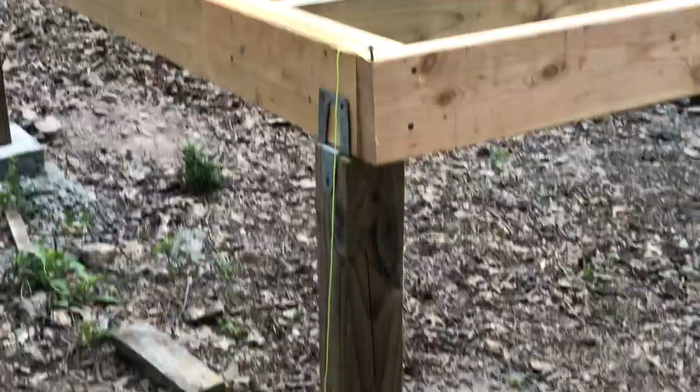So I'm trying to make sure that this is all level, and I put a string line one into the other, and I went through with the level, just kind of checking it out, and it dipped a little bit on that corner, so I raised the corner. Now I'm looking down the string line, and I've got a little bit of a gap, and it starts right there. But I think I need to shim these 2 posts, you can see the gap there. Boy, that joist is kind of gnarly too, I'll have to block it out.

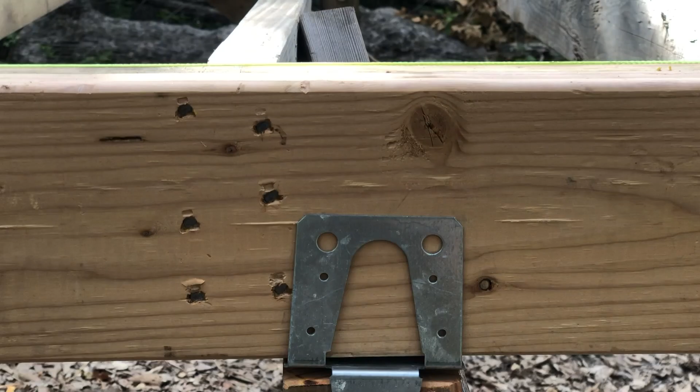I don't know if you can see the gap or not. Yeah, there we go, I got almost a quarter inch. That's more than I'd like, but it's easy to fix. I'm going to put a shim under the hardware, between the hardware and the rim joist on this one

Right now, here's the big stump. I looked at the plans and figured out this is where the toilet is going to be, and that looks strange, I know, but the joist is right in the middle of where the toilet would be, so I've modified it a little bit. I think I might go back later and put in some other supports, like when I'm plumbing, that way I don't have to. I have a ton of room to rough it in, and I'll go back and add 2 joists to give it a little bit more support. I know that's a massive hole, but it's just kind of how it goes.

So I measured, I'm going to have a 2x6 wall here. I measured off that my 12 inches, or 12 and a half with drywall, and then measured another 6 or 8 inches because I've got a doubled up 2x6 for that little girder there, whatever you want to call it. So we're about to finish putting this hardware together, I just wanted to show you that. And I've got one next to it, doing kind of the same thing. It's not as big of a gap, for the tub drain. So it'll be toilet, tub.

I'm back on site, and we are hoping to put on the subfloor today. I got brave and drove up here close. The other day my neighbor drove in a side by side through some tall grass over here. It's kind of on the neighbor's property, but I don't think they're going to care. So that was helpful. Anyway, I'm about to get after it.

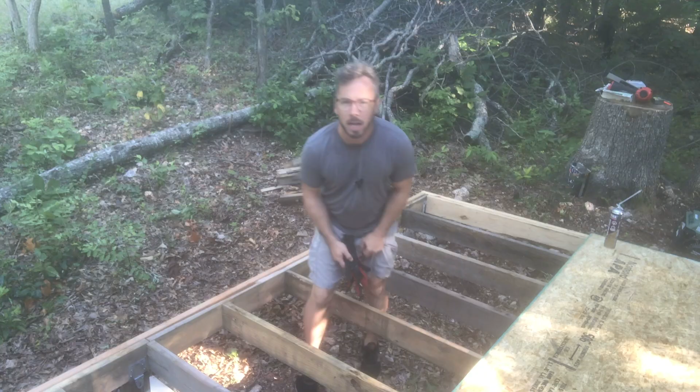I'm about to lay down the first sheet, and I've got this new spray foam. I spent a minute and read the instructions, it doesn't make it sound too crazy. I've never used this stuff, I bought it used from people on the north side of Tulsa, so I don't know, we'll see how this goes.

I sat down, tested my first sheet just to see how it was, and I feel like I'm just a touch out of square, just enough to be a pain in the butt. I can't do any more anyway, I've kind of gone to my limits of flexing the front and the back to make it square. I might have to get creative toward the end of this, which, like I've said before, you've got to be diligent when you first start because everything builds upon everything else. I might have to deal with some out of squareness, but we'll figure it out. I'm going to go ahead and put this down, probably time lapse it, we'll see what happens.

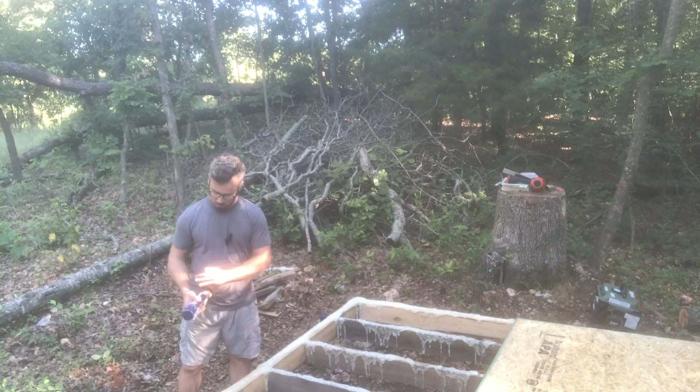I'm going to try another can, that one seemed like it was jacked up. I don't know, the way it came out was not what it looked like on the YouTube video. It expanded and got real frothy and weird. Then I took another can, and it won't even shake, it's like solid. So I might have bought some junk, which is bound to happen a few times, I guess.

I'm going to shake this up and we'll see if we can do any better.

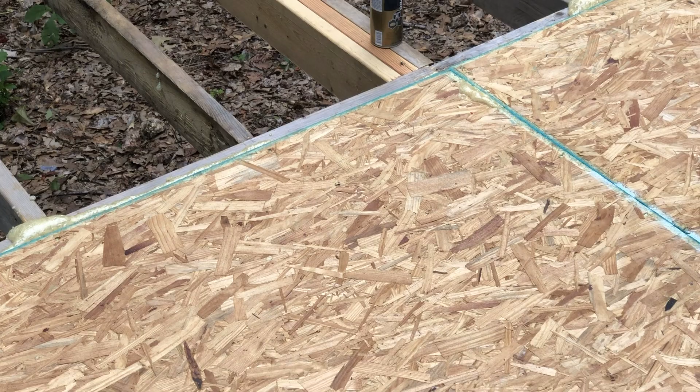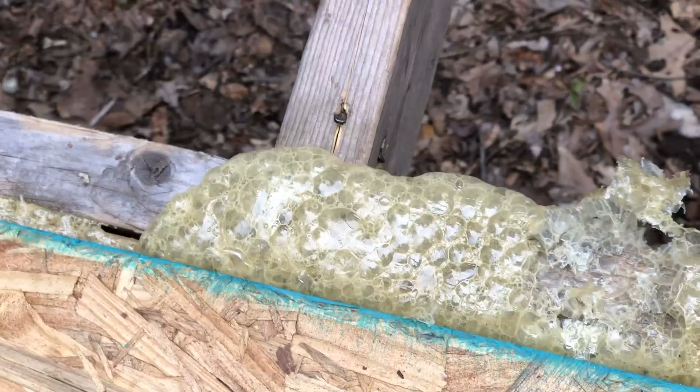We're back on site this morning. We spent the afternoon picking up new materials, and part of that was getting some new glue. This stuff we used yesterday, I think it had frozen or something. It still seemed to do what it's supposed to do, it just didn't go very far, and it was really weird. I don't know. So unfortunately, I'm going to have to scrape all that out because you can't really set it on top of that.

But I'm going to do that, and then I'll show you the new stuff that I've got, which is more what I've used before. It's the stuff you put in a caulking tube. I was hoping this would work out for me because it's really easy to use, you just pull the trigger. A caulking gun kind of wears you out.

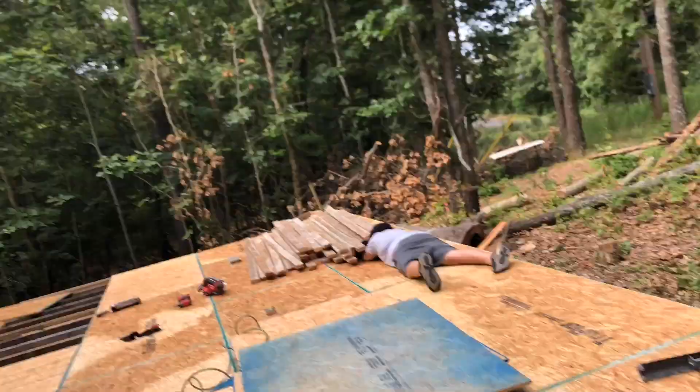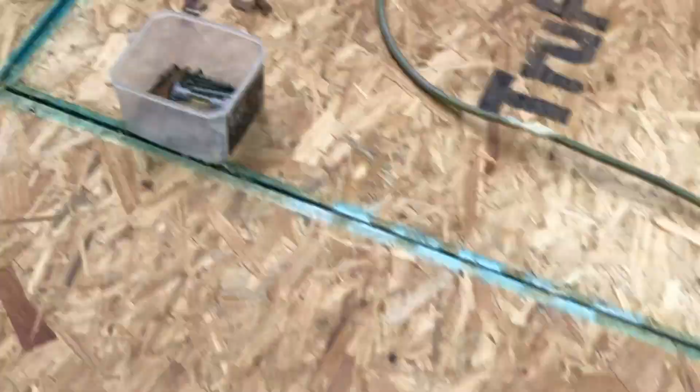Things I wanted to point out while I'm taking a break here. I've got a sheet and a half left for this section, but the material I'm using, you're supposed to give it sort of a gap, and so some of this is intentional and some of it is just fighting the layout. Like, I'm not happy with that gap, but it's the best we could do.

And actually it's a little bit high, like my foot catches it just, 1/8 of an inch. So what I'll do is I'll go back with a belt sander or a hand planer and get it level. Luckily this is the middle of a bedroom, so with carpet and padding it won't be too bad, but I want to make sure I can get it really pretty flat.

But you've got to leave a little bit of a gap for expansion, and also the joints need to be staggered, so it's kind of like a brick lay. I can't get back far enough to show you, let me go over here. You can see my joints are staggered. Every 4 foot is kind of the normal thing. Some of it I may just scab in toward the end when we do the other part of the house over there.

But finishing that up, man, I have had a miserable time with subfloor adhesive. I think the lesson I've learned is not to buy it used, because who knows how long it's been setting.

So another little thing I was going to show you, I was having a terrible time squeezing this out of the tube, and I've seen guys before take and cut this stuff open like this, even when it's brand new and good, just because it's faster sometimes, and kind of scoop it out like you would drywall or whatever, to apply it to headers under door thresholds, stuff like that. I've seen people do it with all kinds of caulking.

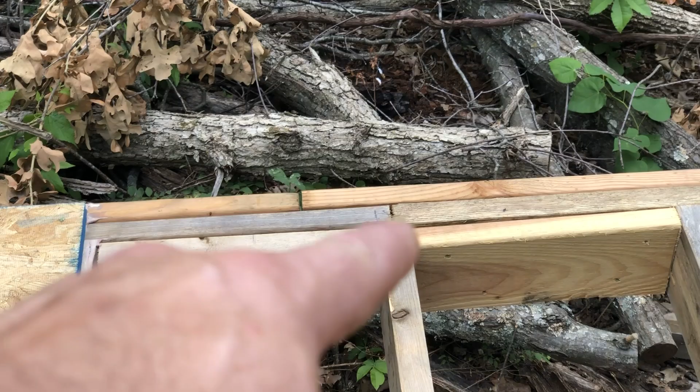Not just adhesive, but that's what I'm doing because I was losing my mind trying to get it on - you saw earlier in the time lapse, I was taking forever. So what I've got, I just cut this open. It's a big tube, I've got a big caulking gun but it's not working so well, so I'm just putting it on there. Honestly it might go on better this way - you might get better coverage because you can go back and fill in the cracks. I've got stuff tripled up here because I've got a joint I'm not super happy with, and I'm actually going to go back and put some building hardware on the outside, and maybe do some more too. I don't know, we'll just see.

But anyway, I just want to give you an update of what I've got going on. I probably won't time lapse this, but we're about to finish these sheet and a half, and then we'll get on to laying out the walls.

Last thing I wanted to mention is that I'm using ring shank nails to nail this off, and it ends up being one every 6 inches on the outside, and then kind of that as you follow the lines. What I've done is just nail off the edge and try to note where the joists are with just one single nail - you can kind of see that maybe right there, it's hard to see. Then I'll run a chalk line, snap lines, and just batch process the whole thing, hit them all at the same time. I found that to be more efficient. Anytime you can batch process, it's good, and you can't always pull that off when it's just you or when you're filming or whatever. But anyway, there's the nails I'm using, for all the haters in the comments or whatever.

Sometimes you'll put these down with screws and nails. Man, by the time this has adhesive and ring shanks in it - and I know there's going to be some spots where we end up cutting it out - it'll be a pain if there's a fastener in there. Trust me, it always is.

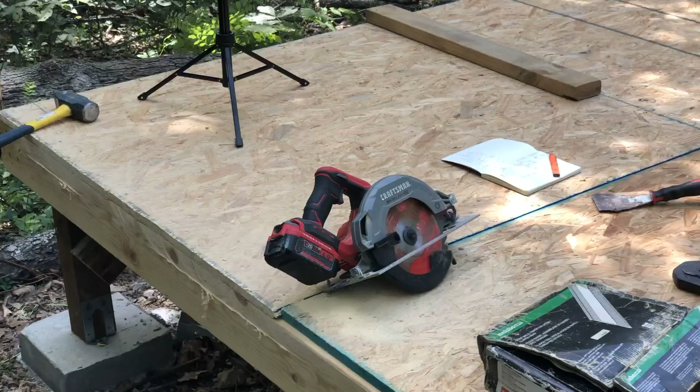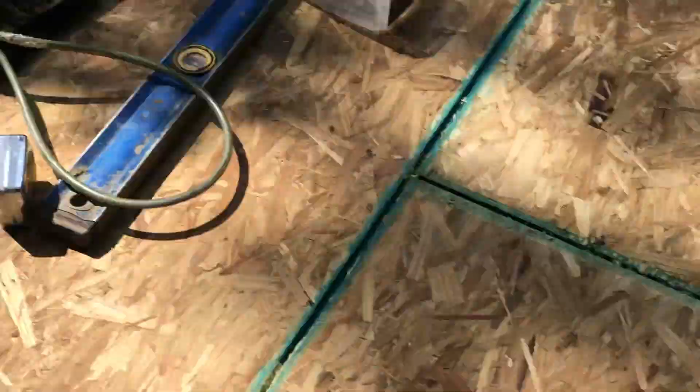Well, I'm about to lay out the front wall, or at least a section of it. I think I'll do half of it, then the other side of the door, and then whatever. I'm going to snap some lines after - I think I'll just roll with this first wall, snap lines after, because it's pretty simple layout. Right now I'm using my phone to look at this so I can't really video, but here's kind of a rough sketch, and that's kind of comical.

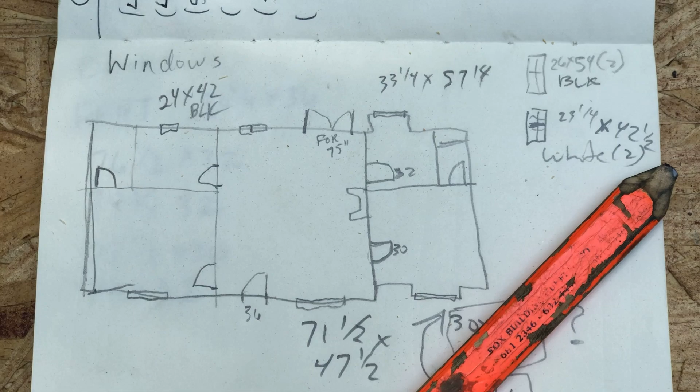But this is such a simple thing - everything is really to normal measurements. It's not like I've got to go 93.5 to the center of the window or whatever. But that's kind of how you do it: when you read plans, it'll give you measurements from the outside of one side of the plate of the house, and measure to this, and that's your center. Then you put your layout according to that, which is super important.

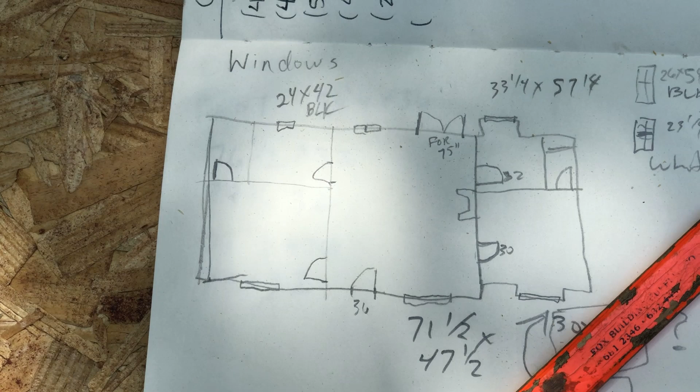In general, but really on a slab it's paramount, because I see all the time where plumbers have missed their water lines and have to go back and bust up the slab and replumb, or move their plumbing 2 inches one way or an inch one way or something. It really matters there. The good thing about doing it like this is wherever that wall lands, I'm going to rough the plumbing in there.

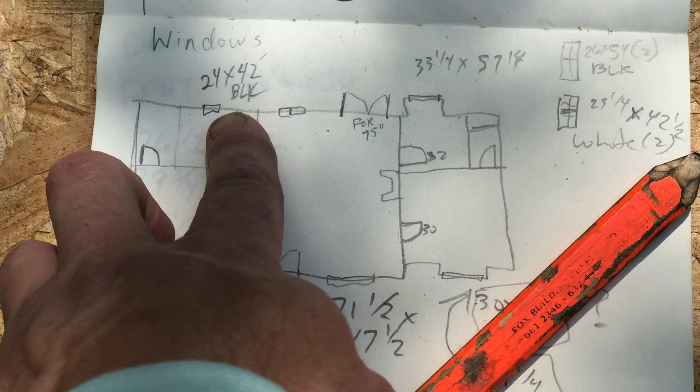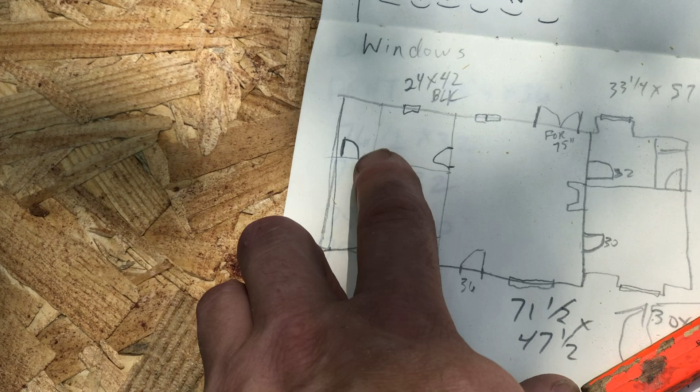The only thing I've really got to be diligent about is this bathroom spacing, because I need exactly 5 feet for the tub, and then I've got a 32-inch vanity, and you're supposed to have 30 inches for the toilet - if you have 28 inches, it'll work, but it's just not what you should do. So I'm actually fudging that spacing probably just an inch or two, but there's little things you can do. I wish this closet was a little bigger, it's only 3.6 wide - you're supposed to have at least 4 feet wide - but I'm going to design it in such a way where it should work just fine. I'll build it out to where it'll be good closet space.

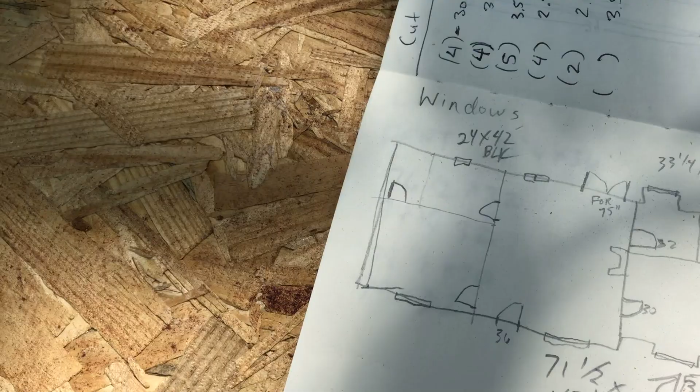I had the room, so I thought I'll make it a walk-in. And then this one over here we'll do better with. This is the other bedroom walk-in closet. Same kind of thing, pretty small laundry room.

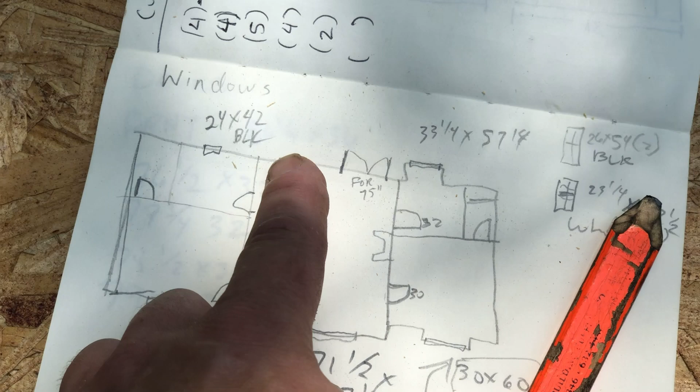But there aren't many walls to frame. We got the outside walls, and there's this one at 12 foot in the middle. And then under it, I decided the other day I'm going to pour another little pier to hold the weight, transfer weight of the beam that's going to span here. This will be a cathedral ceiling in the living area.

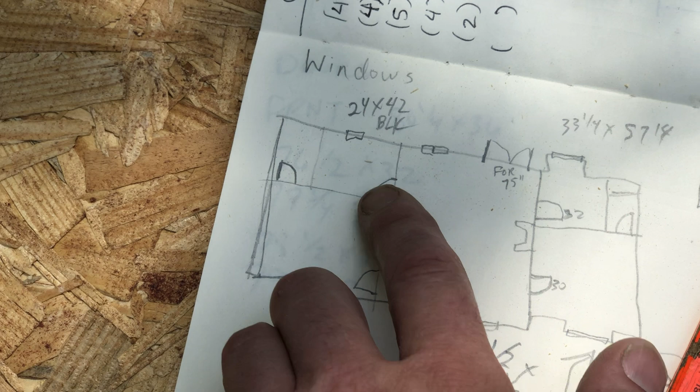But these little walls, they don't matter too much. This will be pretty easy layout. And if it's off an inch, well, actually that's got to be pretty good, or I'm going to have to fur it out—I've done that before—or have to buy a shorter bathtub or whatever. It's a pain, so I want to get this right at all costs. But I'm going to measure right now.

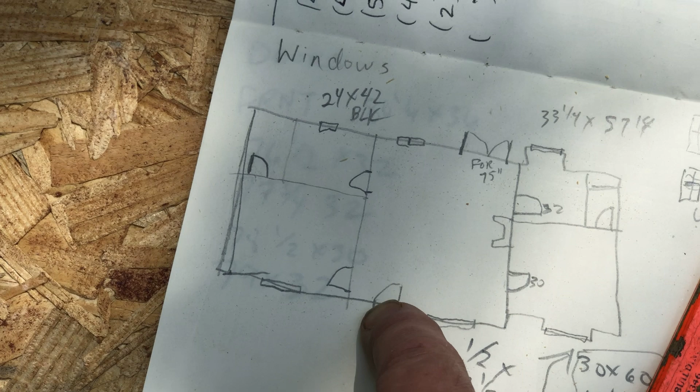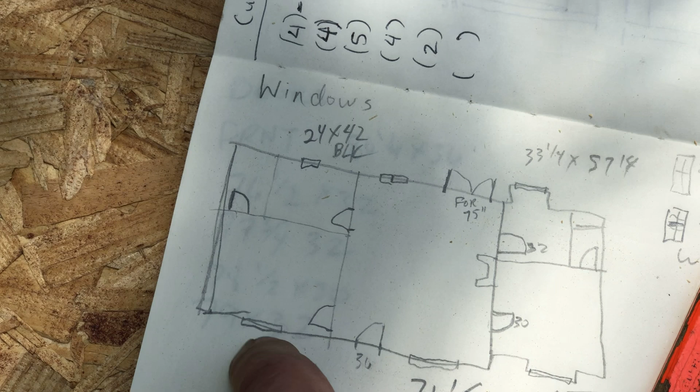I think I'm just going to focus on this front wall and figure out my layout for this window and this door, then stop there and continue out. My goal was to get this window centered in the bedroom, and also spaced out in the house so it looks good from the outside. So that's what I'm going to do right now. I'll set this up and time lapse it, but there's not really a whole lot to see—you just see us raising a wall.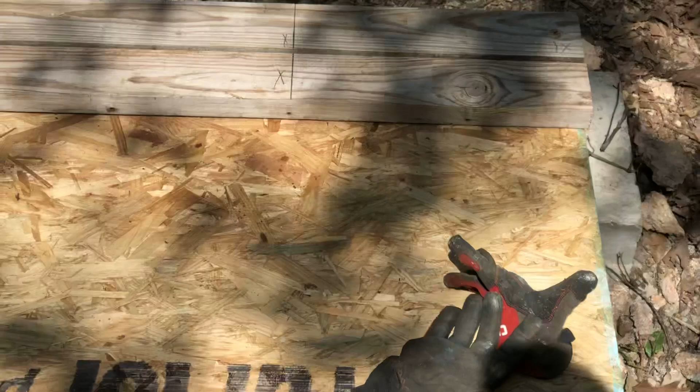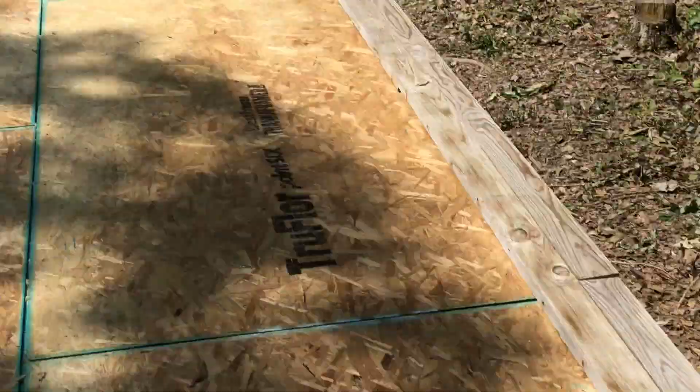Okay, so I've got my top plate and my sole plate laid out—this is the front wall. What I did is I've got 8 footers, because I've got like 9 footers, but I should have brought some longer material. I prefer to have sole plates that are at least 12, but I forgot, so I'm just making do. I don't think it'll really matter in the end, because you stagger it and you've got doubled up material on the top, and the bottom is secured to the floor. So anyway, I did my layout—I'm on 16-inch centers.

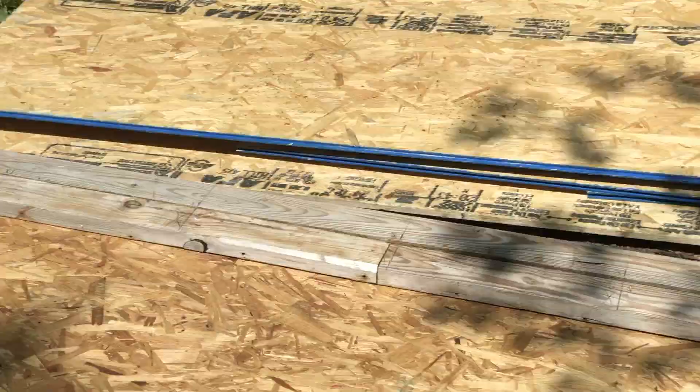I'm about to go in and figure out the window and the door on this side. I ran the end of that one wild, and then I started at 4 foot on this one just so I could stagger things. That one, I think I'll frame half the wall and just let it run wild where the header is—I didn't want any sort of joint close to where the header is going to be. So anyway, that's how I've laid it out.

I've also got to cut some studs. They're 92 and 5/8—I had to go and kind of remember that. These are just random cuts, I mean they're 9 foot plus, all of them. I'm going to cut them down to 92 and 5/8, and that gives you enough room for your flooring and your drywall and all the other stuff.

I don't think I'll set up—I'll probably do it in time lapse and then maybe dig in a little deeper once I start doing the header for this window and the header for that door. Well, I've got everything laid out. I had to do a little bit of math and figure out how long to make my kings and my cripples. I'll show you the header detail after it's done and describe it. I'm sure there's a million other videos on YouTube that'll explain it better, and there are a few different ways to do it. So just consider that—this is again for inspirational purposes.